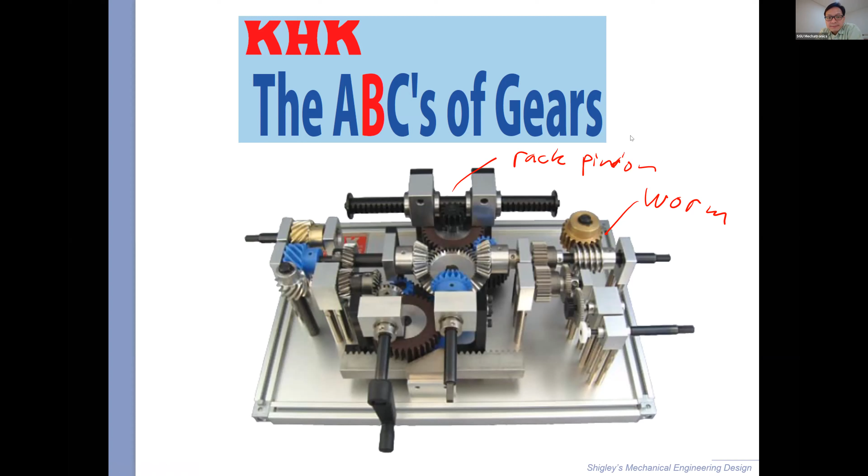Gears are one of the oldest mechanisms, because with belts, and probably true for chain, you need some complexity of rubber. You need to invent rubber, right? And then you have to know how to mold rubber with steel belts together, make it flexible but also strong. I guess they used leather in the old days as belts, but then rubber belts, more sophisticated belts, were invented later on.

Gears are pretty old. They say it's 350 BC, 2,300 years ago. These are one of the oldest concepts of gears here. You see the tooth is not exactly in a shape that is involute. That's the proper shape of a gear. It's called an involute. Okay, here is the modern gear with the proper shape.

The one that is most common when we talk about gears is really the spur gear. That's the term, okay? When you say regular gear, that means spur gear. Many times though, like in transmissions, we use helical gear. In car transmissions, I should say. Car transmissions, the forward motion mostly uses helical gear.

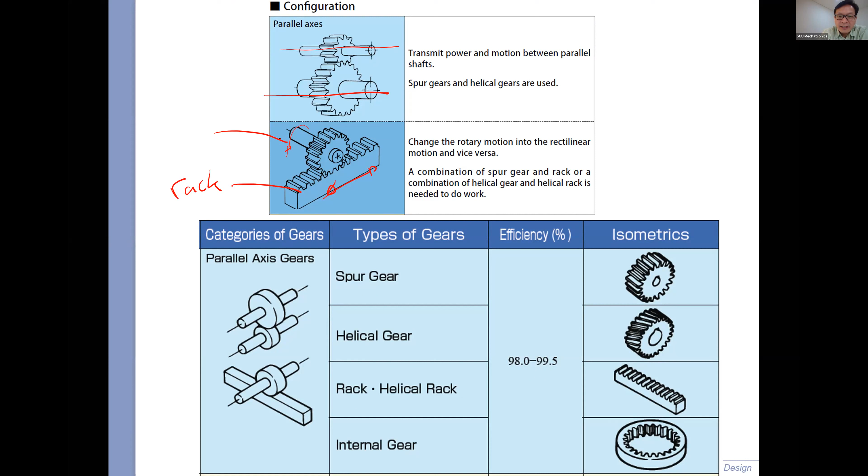Let's talk about them here. Yeah, I have this slide actually. Parallel axis, right? So spur gear, parallel axis. Here is a different configuration. Again, rotation and linear. This is called rack and pinion. The bottom one is called the rack. The gear here is called the pinion.

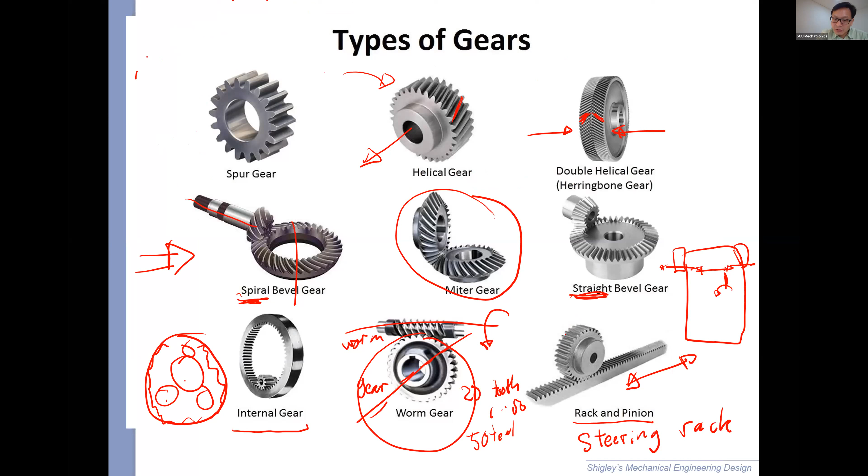You got intersecting axis gears here, the bevel. Miter is just a 1-to-1 ratio bevel gear. Okay, you got the straight bevel gear, got the spiral bevel gear.

Hold on, I need to get some tissue. I got my allergies today.

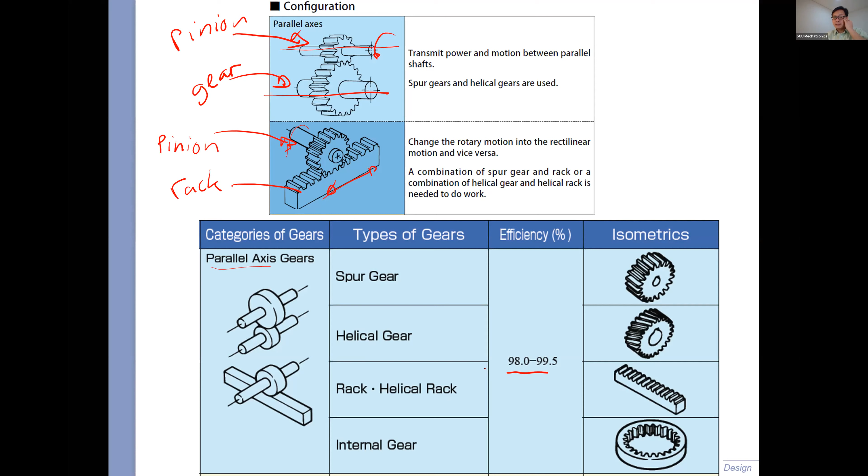Straight bevel gear. You see these efficiency numbers, by the way? These gears are very, very efficient. Power loss is really, really low. In fact, in your car engine transmission, a lot of the losses is due to churning the oil. Churning the oil has greater power loss than the gear inefficiency itself. Yeah, amazing, right? Probably your bearings have some power loss, but not the gears.

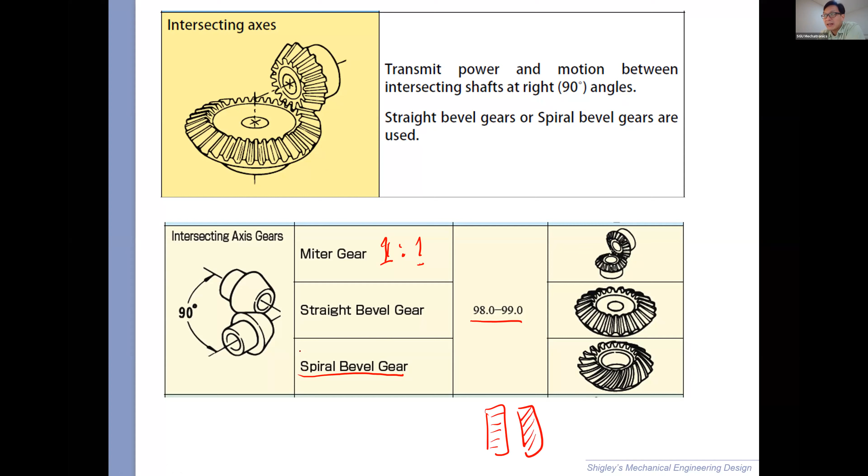But it's the same concept here. You got the smooth power transition. Your reverse gear is straight, by the way.

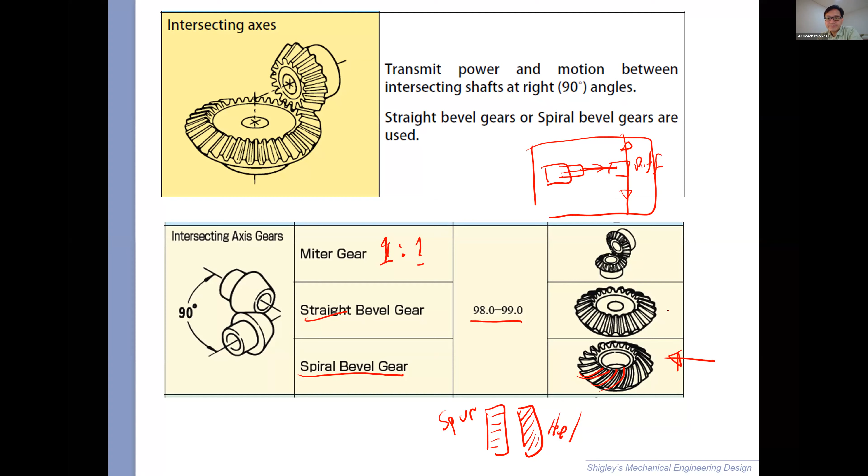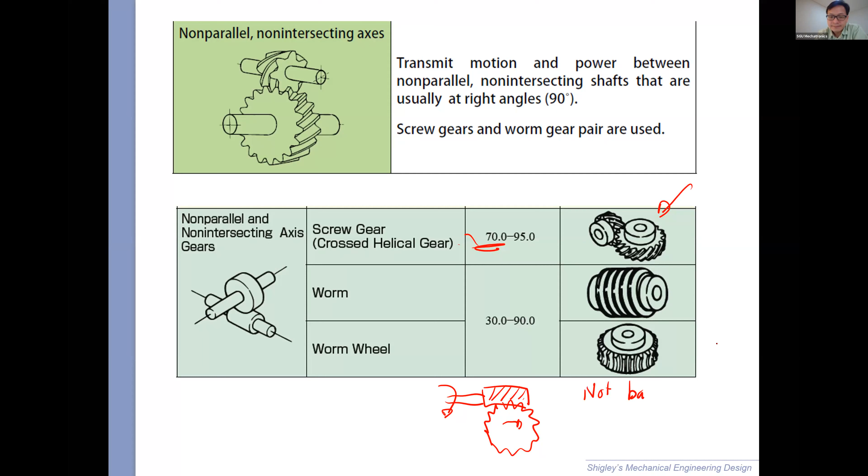So if you have a regular spur gear like this, if I drive it from the pinion to the gear, I can also drive it from the gear to the pinion, right? If I turn the input, this is the output; if I turn the output, the input also turns. So I can go both ways. In fact, if I have a gear ratio of 1 to 3, basically I can do 1 to 3 or I can do 3 to 1, depending which shaft I use as the input. Correct? Not so with worm.

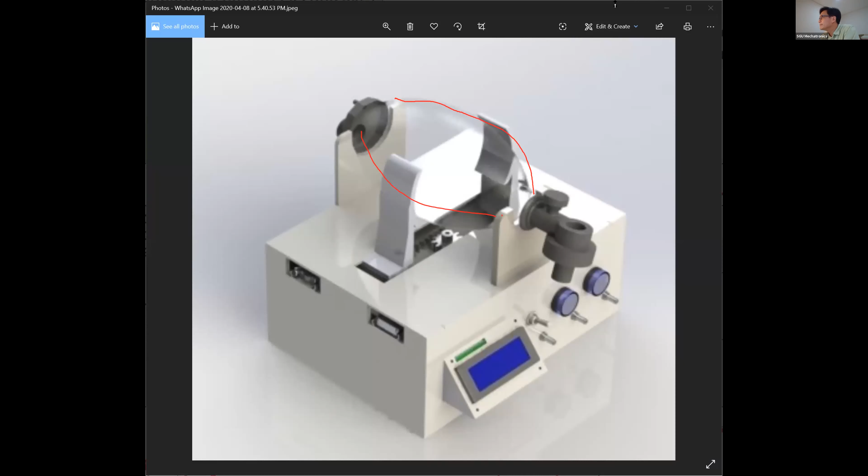Jadi ambu bag itu adalah bag yang dipakai di rumah sakit buat emergency. It will pump your lungs and put oxygen into your lungs, sementara sambil nunggu kamu di-attach ke ventilators yang bakal do the pumping on your lungs automatically for 24 hours.

Nah, tapi ventilators, they're running out of ventilators. Kalau kalian dengar, Presiden Trump di Amerika aja udah suruh pabrik mobil bikin ventilators karena we are running out and we cannot get up to capacity as soon as possible. We're racing against time. Salah satu solusinya, kayak di MIT, di banyak university ini lagi bikin ini.

Jadi apa alat yang kita bisa pakai untuk kompres ambu bag ini? Ambu is just the name of a company yang dulu bikin nih barang, makanya dibilang ambu bag. Ya, ini dipencet lalu bisa kasih ventilation.

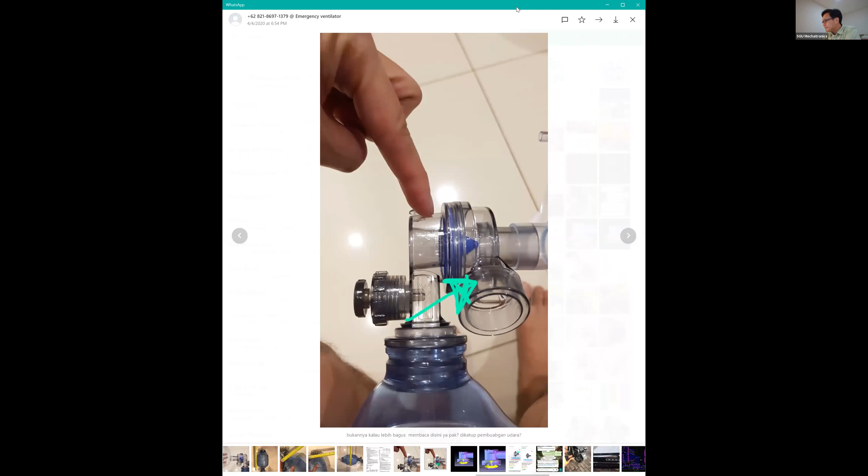Nah, ini ada one way valve-nya, keren banget. One way valve-nya ini dia push air into your lungs, tapi waktu kita exhale dia keluar lewat jalur yang berbeda. Nah, ada valve kayak gini nih, kalian kelihatan ya? Ini jadi duckbill valve.

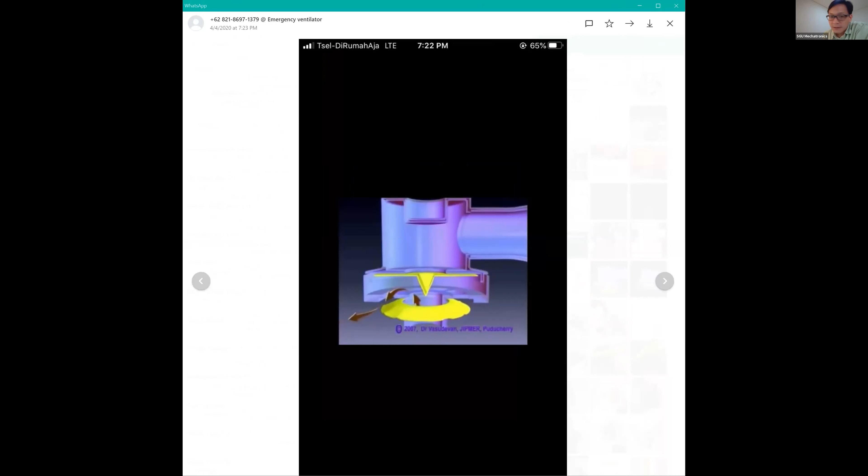Jadi angin dari sini masuk ke bawah, tapi kalau kamu exhale, ini keluar ke samping. Itu ada one way valve-nya.

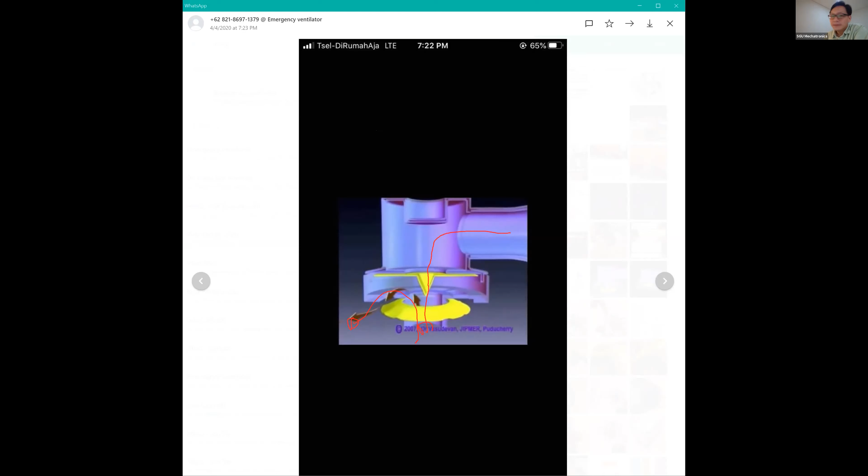But what I wanted to show you... mana ya? Nah, ini.

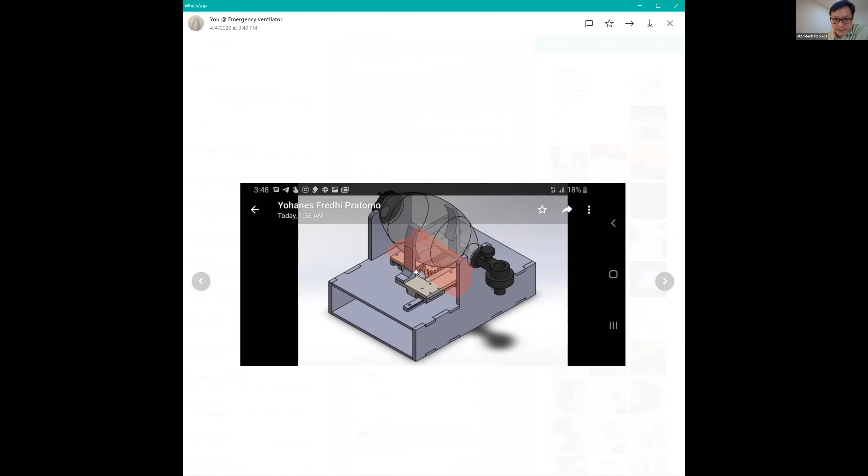So our first design, itu ada rack and pinion. Jadi tengahnya muter, bawahnya ini motors, terus dia ngompres. Kalau dia rotate one way, dia ngompres. Bisa bayangin nggak? Bisa, Pak. Ya, so it's a rack and pinion mechanism.

Nah, kita sempat pikir mau pakai worm drive, ngejepit, atau gimana gitu ya. Tapi masalahnya, salah satu requirement-nya kalau medical device adalah emergency, you have to always think about safety, right? Kalau kenapa-napa, ini mesin nggak jalan, ambu bag ini harus langsung bisa diangkat, lalu dipakai tangan lagi gitu mompanya. Kalau dia lagi posisi ngejepit, and then let's say the battery runs out, atau Arduino-nya fail, whatever, keluarinnya itu susah kan? Armnya kita mau buka nggak bisa.

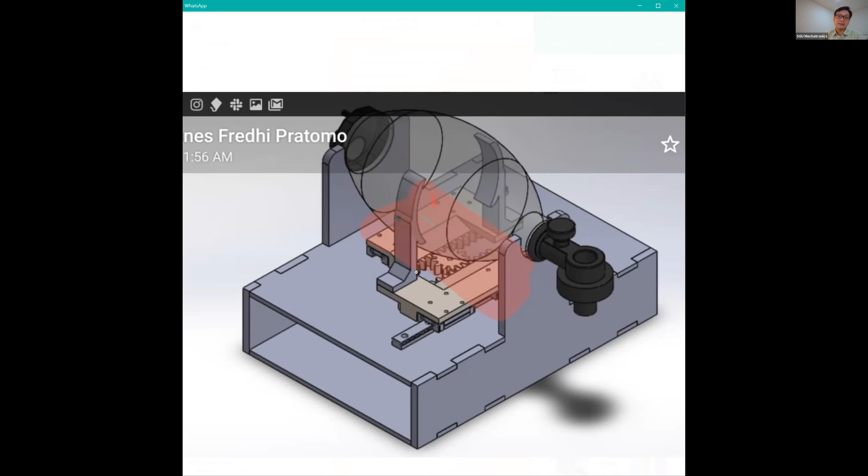Nah, itu karena tidak back drivable. Rack and pinion ini bisa. So one of the requirements, any mechanism that we use here has to be back drivable, gitu. That's what I wanted to say. Ngerti ya?

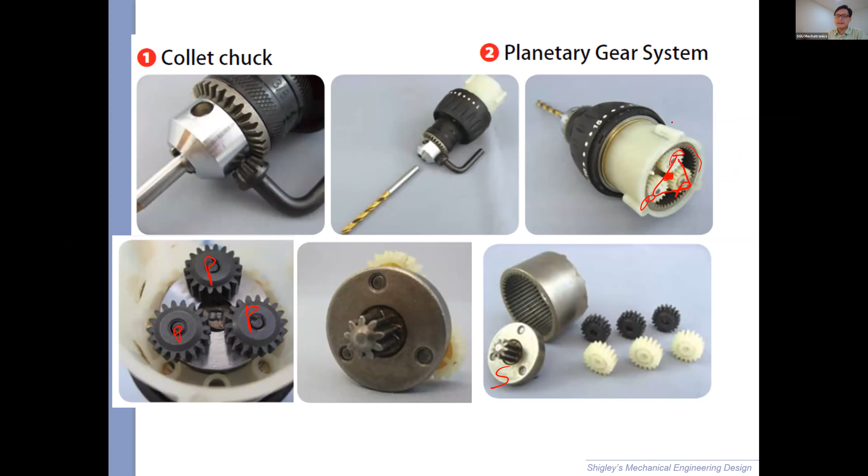Nanti saya kasih lihat mekanisme-mekanismenya pakai video ya.

Speed ratio, we talked about this a little bit last time kayaknya. Intinya the speed ratio for gears can be calculated using the number of teeth. Very simple. Jadi kalau number of teeth di sini 10, di sini 20, ya rasionya 2:1.

Yang mana yang antara yang kuning dan yang biru, mana yang speed-nya tinggi? Gear 1, Pak. Gear 1 high speed, gear 2 low speed ya.

What about the torque? 20 lebih gede torque-nya ya? Lebih gede torque karena dia low speed. Low speed, high torque, high speed, low torque. As simple as that. Jadi kalian harus selalu mikir, yang kecil, kalau dalam gear ya, yang kecil itu high speed.

Dalam arrangement kayak gini, yang kecil itu muternya pasti lebih cepat daripada yang besar. Dan selalu yang lebih kritis itu yang kecil, oke? Karena dia lebih lemah biasanya.

Nanti kita bakal get to the calculation. Dalam belt pulley system juga seperti itu, karena pulley yang kecil ini nempel beltnya lebih kecil, lebih sedikit, kemungkinan dia selip lebih besar kan? Kalau yang di sini kan kontak dari beltnya lebih panjang, jadi kemungkinan selipnya di belt di pulley yang besar lebih kecil.

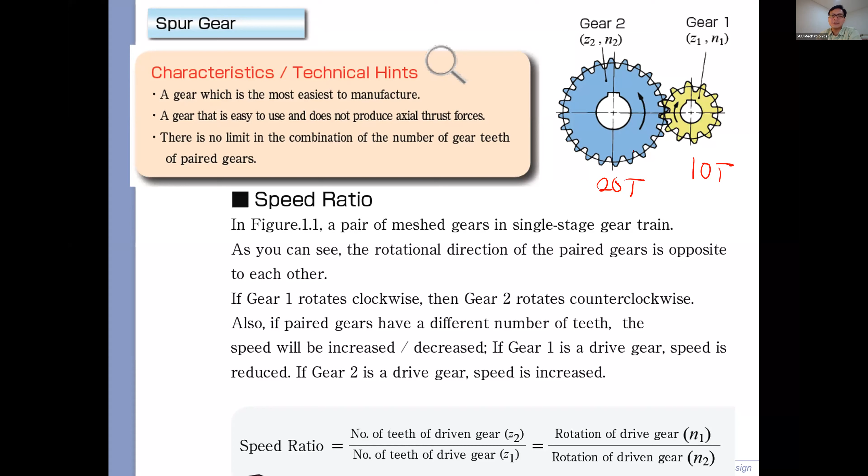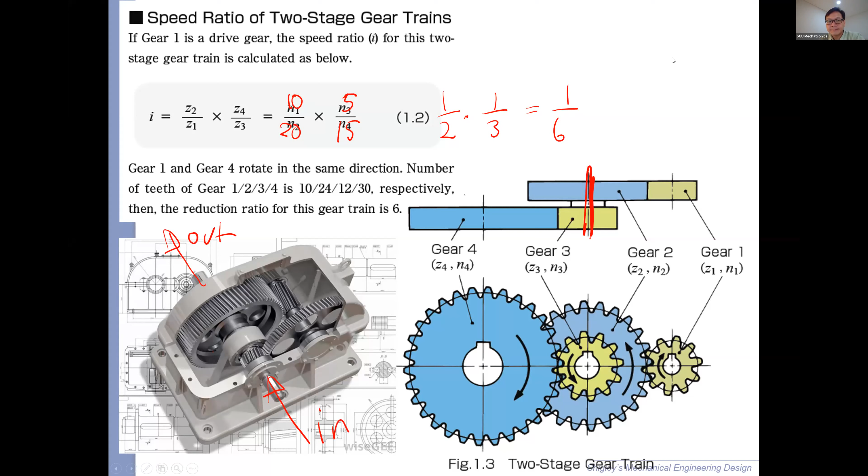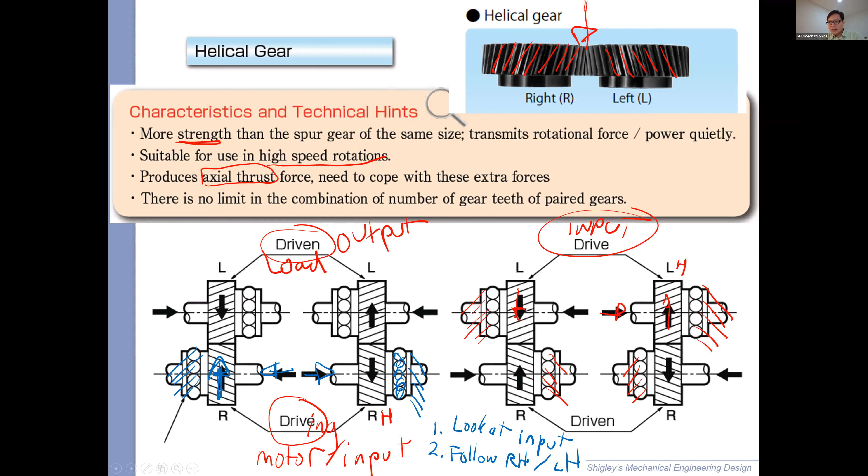All right. Internal gears. Now, the way we use internal gears is more in the context of planetary gear system. Let me play a video. Let's do a video on planetary gears. Oke, saya kirim via chat ya.

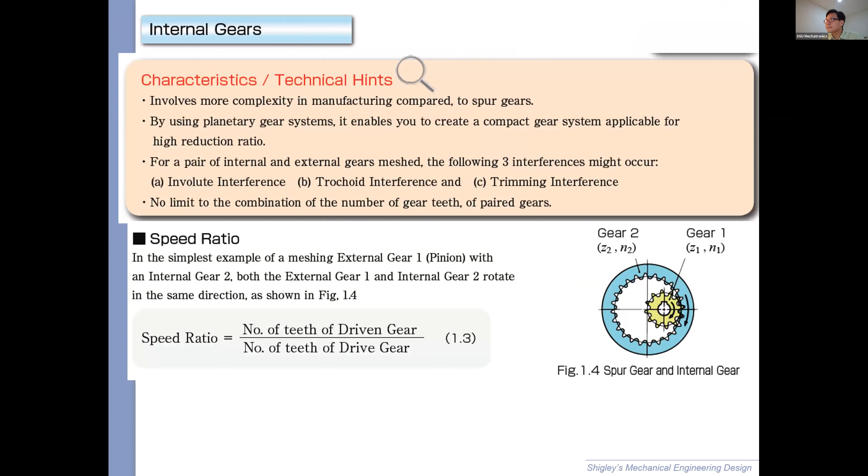Okay, internet's a bit slow. Go ahead and play the video. It is almost 5 minutes, so let's talk 5 minutes from now. Go ahead and click. Oh, ini kagak tuh. Oh ya, to everyone. Okay, hold on. Okay, does everyone got the link? Di chat ya. Okay. Go ahead and play the video, 5 minutes. Udah ya? Saya coba jelasin beberapa hal di sini. Okay, everybody's done? Can you respond? Udah, Pak. Ya Pak, udah. Okay.

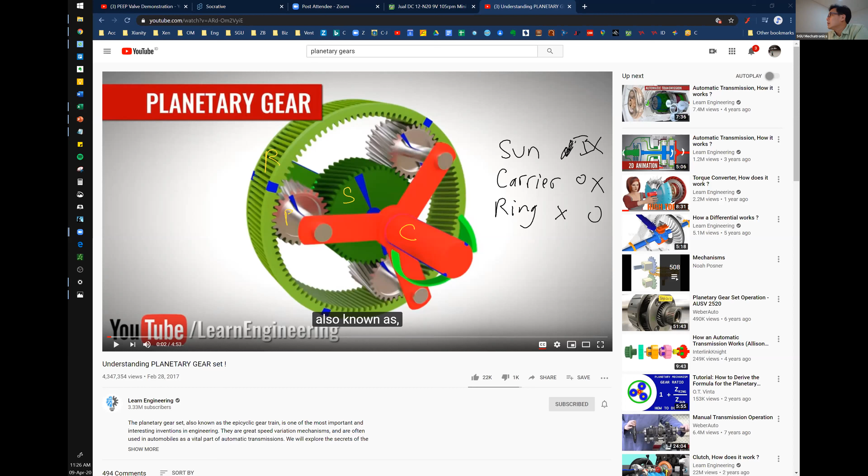Or you can fix the sun. No, you fix the planet, and then everything rotates together. Okay, that's the third mode. I have another video on that, so it's not this one.

Let's see. No, I showed that one. No, that's pretty much what I want to show. Okay, those are the three modes. I remember I have one more video on that ratios.

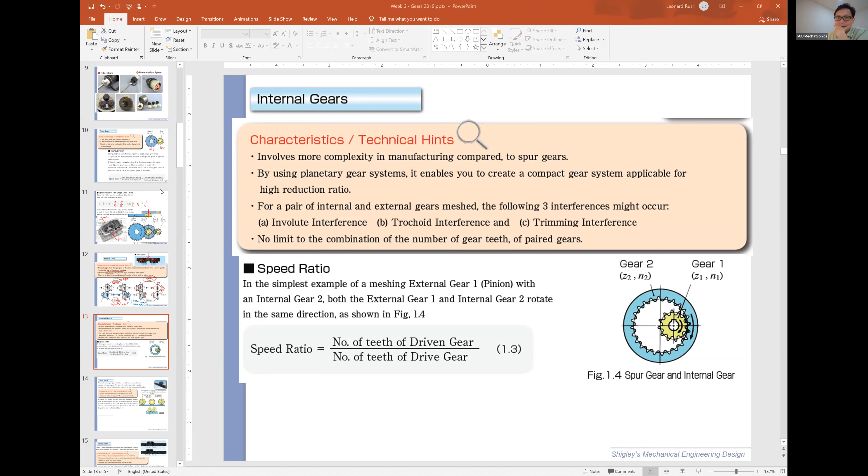Advantage of helical gear. Ini screen share saya udah balik ke PowerPoint kan ya? Udah, Pak. Okay. So it has more strength, and the reason it has more strength is because you have multiple teeth in contact at the same time. Ya. Jadi kalau spur gear kontaknya kan begini. Karena dia miring, dia ada multiple teeth yang bisa in contact at the same time. Jadi it has greater capacity. You can do high-speed rotation also because it's less noisy, less vibration. Those are the two main advantages of helical gear.

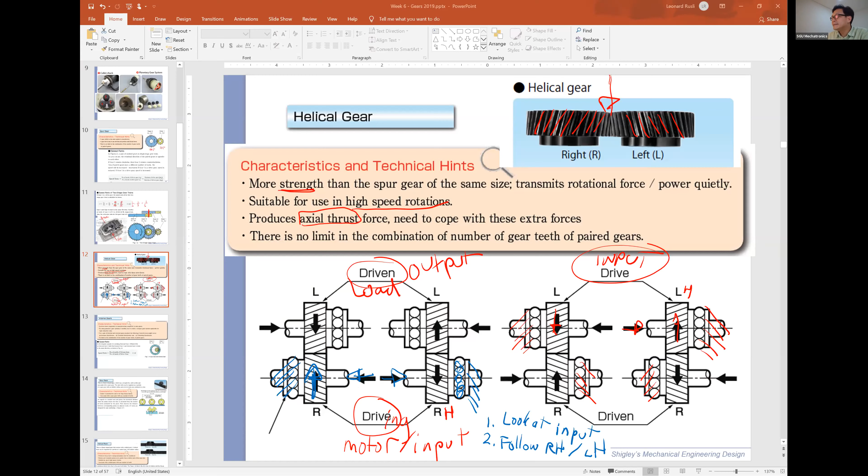Yeah, so your helical rack. Dia nggak exactly helical, but it's straight, slanted, right? You see the teeth are at an angle. You got left hand, right hand. This also creates a thrust, okay? Look at the bottom here. There is the drive, meaning the input. In this case, the input is almost always the pinion, ya.

The pinion, kalau dia left hand pinion, ya kan? Use your left hand. Okay? So, karena dia begini, thrustnya ke atas. Di sini juga sama, right hand. Thrustnya ke atas, thrustnya ke bawah. In the picture. So, same rules. Just use your right hand or left hand, depending on what the input is, not the output.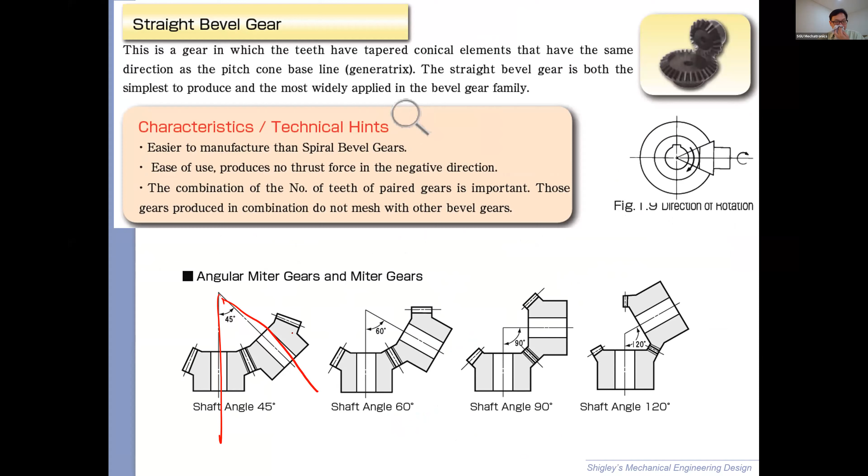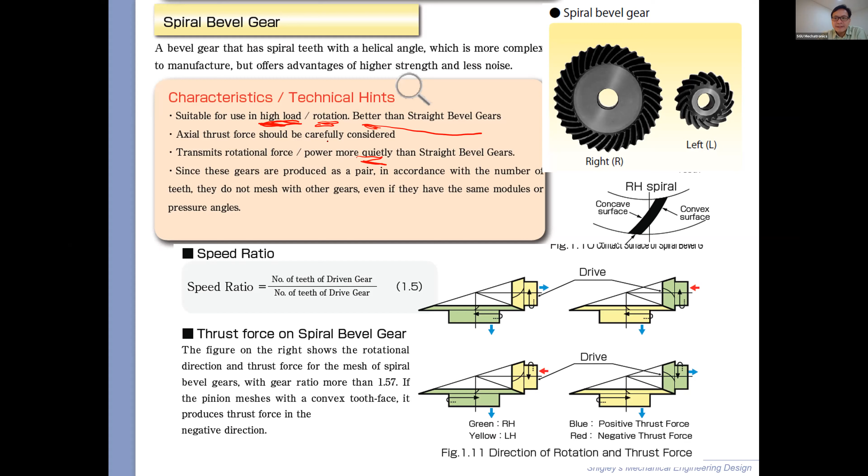They can be at a different angle, by the way. I rarely see them though. Not that common, but they can be at a 45-degree angle. Okay, same as the contrast between helical and straight gears. The spiral bevel gear compared to the straight bevel gear, they can do high load, they can do high RPM. In general, they're better than straight bevel gears. It's quiet, just like helical. All right. Manufacturing probably a bit more expensive, but they got the advantages.

Okay, so you see you have the reactions here, right? So the thrust bearing, okay, so you got right hand helical. It wants to move this way. Rotation is this way, okay, this way. So the thrust is this way. Oops. You got the bearings here. So just use your right hand or left hand on the input there. And in the case of worm gear, the input is always the worm.

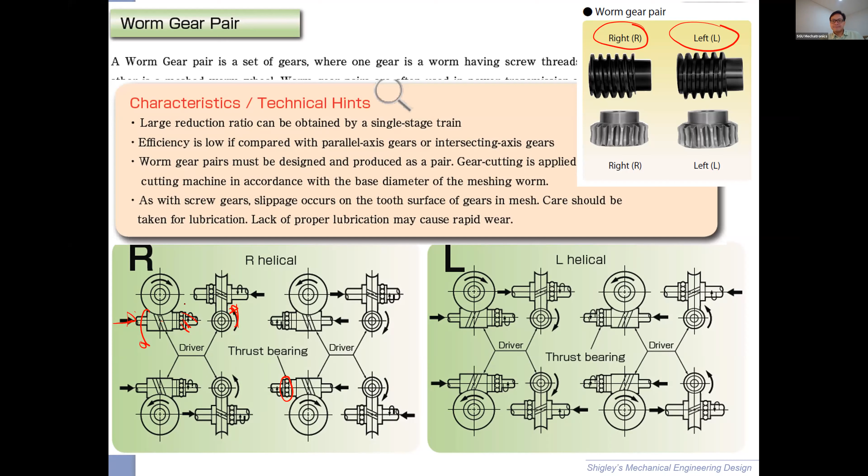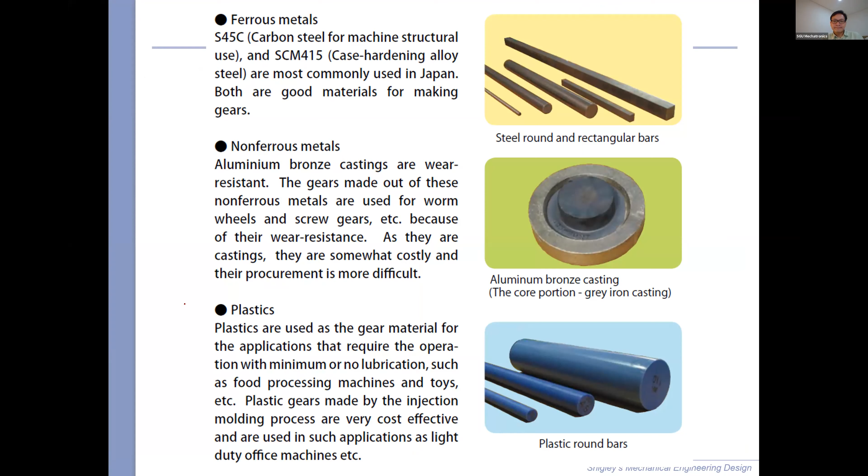Gears can be made out of several different materials: ferrous metals, non-ferrous like bronze, aluminum bronze, plastics, very common. When you have low load, really nice, right? Doesn't take as much lubrication because they're usually pretty low friction. A gear tooth, you can break the gear tooth here because what do you call this thing? Remember, whenever you have a sharp point like this, what do you call them? Stress concentration. Stress concentration, correct. Okay. When you have contact like this, it's also stress concentration, but when you have bending, again, here's the stress concentration. Usually you put in a bit of radius.

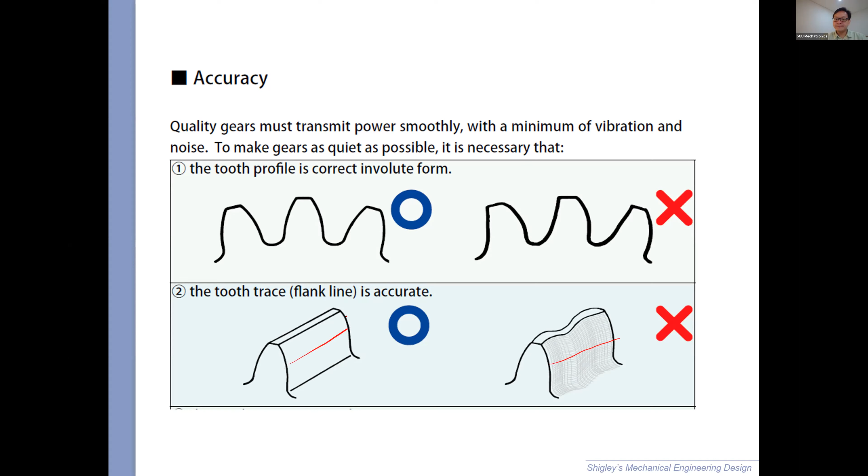Tooth accuracy is important in manufacturing. The tooth trace line here also needs to be straight. Tooth contact in the middle instead of at the edge. This has to do with your alignments between the shaft and the center distance. Okay. Run out. You remember run out, right?

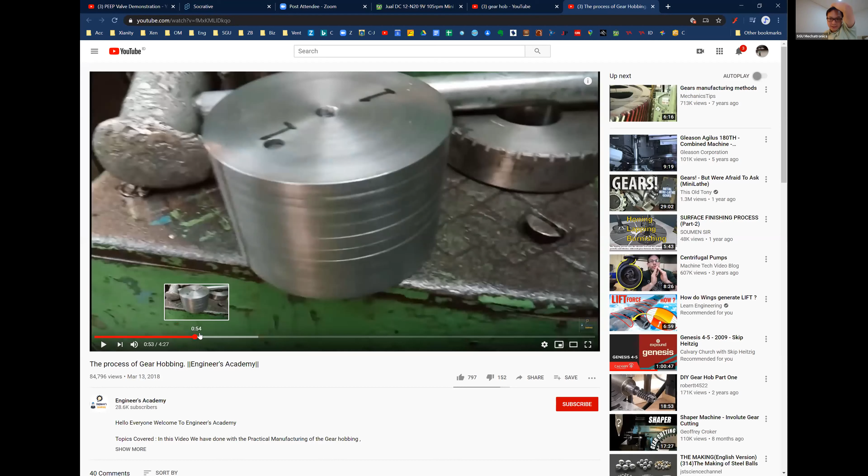So the way you manufacture gears, first you start with this big piece, right? Let me skip some of these. There. You got this cutter trying to cut the gears. So it's cutting the gear tooth. In straight gears, it's easy, but in helical gears, you gotta move the shaft while you're cutting.

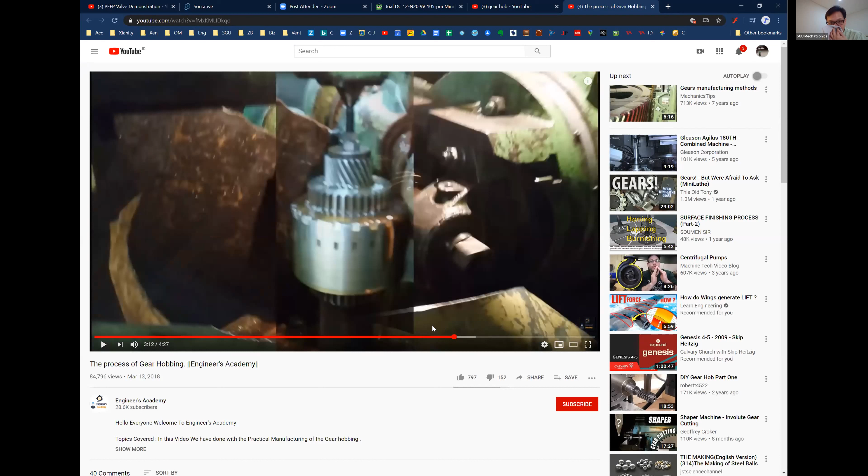Yeah, a lot of lubrication. You see the gear tooth is starting to form. And then eventually it gets to this. So these are the gear cutters. It's called a gear hob. And you got your gear like that. So this is called the gear hob.

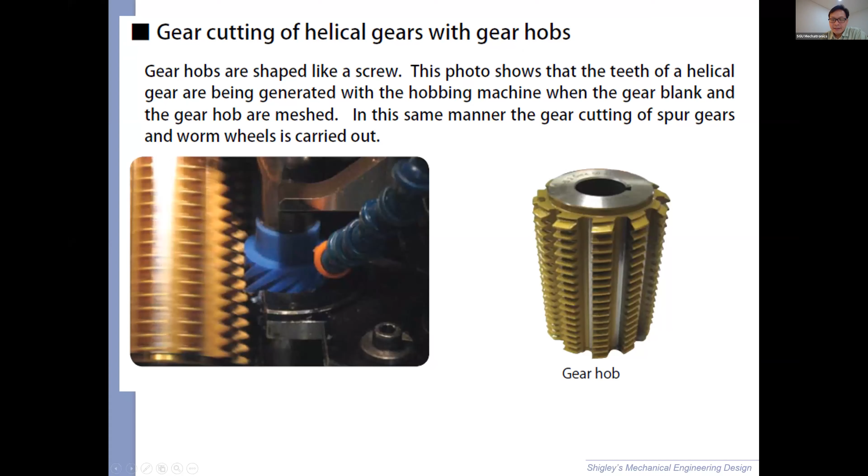Plastic gears, you do injection molding, obviously. You got sintered metal too. Here's your powder metals packed together, and then you put it in an oven. So they sinter, meaning they melt and they bond, and it becomes a solid piece. It's a bit porous, but the good thing about this, you can mix in your lubrication too, right?

So let's say you're making a bronze and you want to mix in some carbon or other lubricants, you can manufacture it together. So as the gear wears out, you got the lubrication in for dry applications.

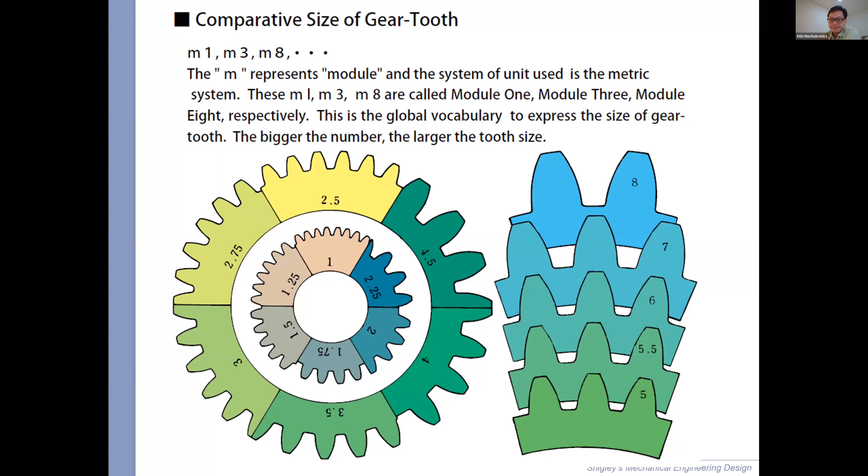But for tiny pieces, high volume production, powder metallurgy is often the manufacturing method. Size of gears: the tooth itself has sizes and they're called module, right? M1, M2. The greater the module number, the greater the size of the tooth and the greater the capacity. The shape of the gear tooth is actually a special shape. It's called the involute, okay?

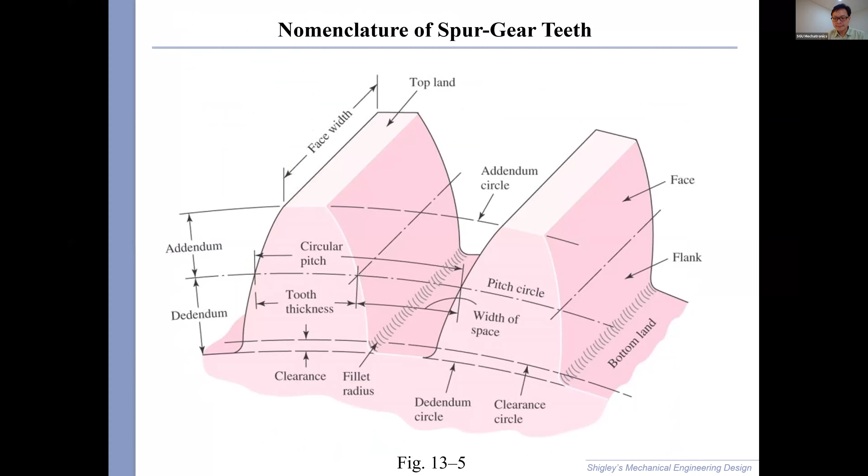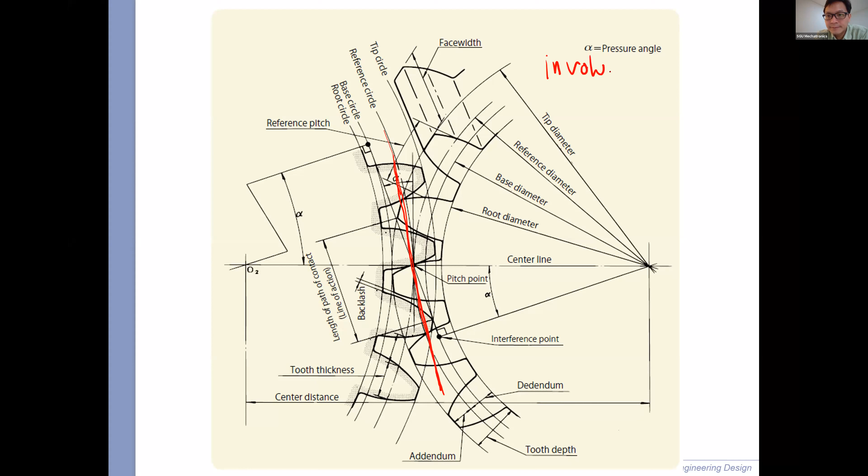They make contact along the line. This is called the pressure line. Oops. Okay, it's a bit tough. There. That's your pressure line. So your gear will always make contact along this pressure line. If your gear tooth shape is not exactly an involute, they will not have this straight pressure line, which becomes a problem because then your torque transfer is not constant.

Here's a bit clearer. Okay. Here's the involute profile. The way you do this is, think of a wheel, and then you wrap this with a thread (benang). Ya.

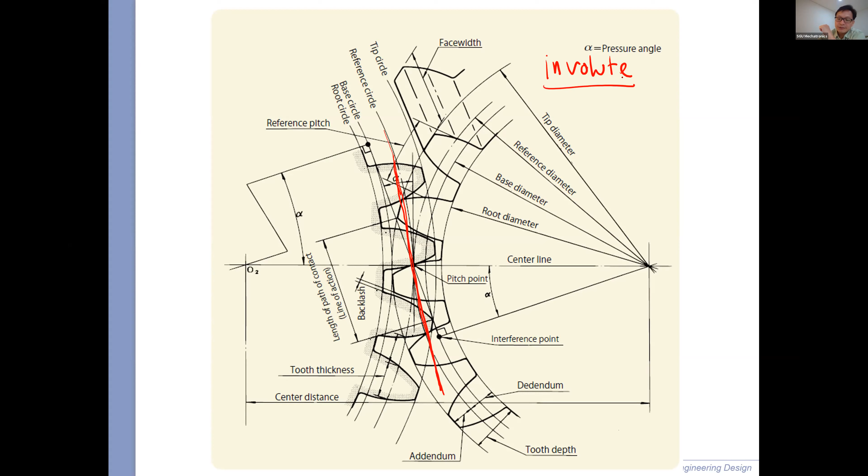And that creates that smooth power transfer. So it's a special mathematical shape. Okay, this is the pressure angle here. There. Okay, the gear contact is always made along this line.

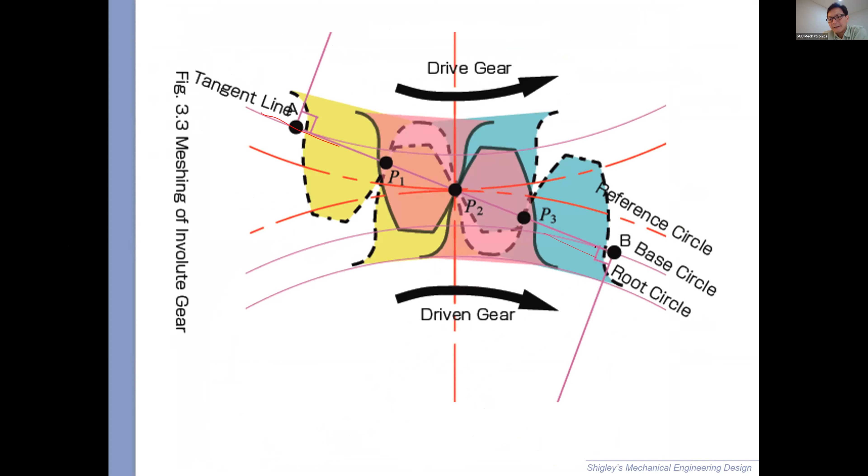The shape of the involute also varies by the number of teeth on a gear. Once you have a larger number of teeth, the shape of the involute approaches a triangle. And if your number of teeth is less, then the shape is more like this, and they usually make an undercut so that they don't collide.

These are just some tooth geometry. I'm gonna skip some of these. Here is your rack and pinion. In a rack and pinion, the pinion has an involute profile, but the rack has straight teeth like this.

Remember, a rack is pretty much a spur gear with a diameter of infinity, right? If you think of a gear, you make it bigger and bigger and bigger. Eventually, it's as big as this Earth, right? If you look at the Earth, it looks flat, but it's not flat. I'm sorry for those of you who believe in flat Earth theory. Okay, it's not flat, but it's a very large diameter, right? If it's so large, then it looks flat. And that's exactly what this rack is. The rack is pretty much a spur gear with a pitch diameter of infinity.

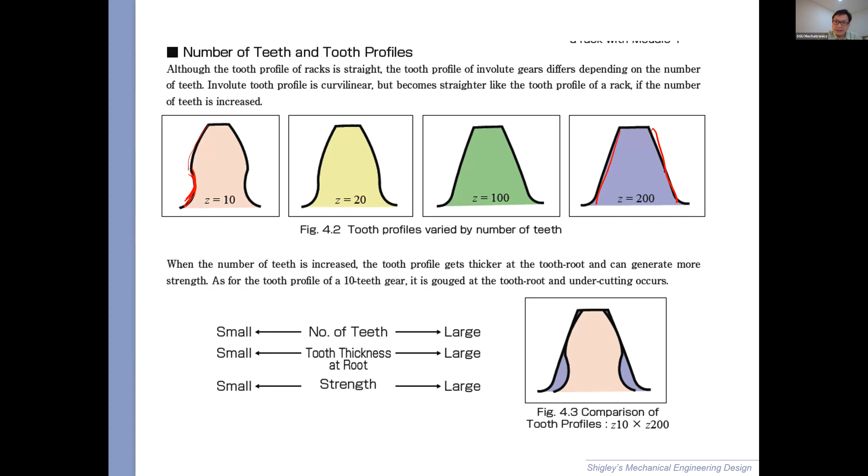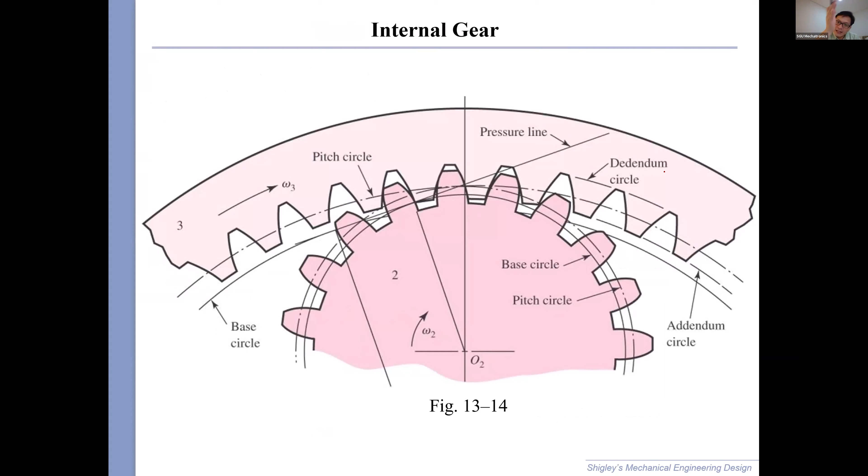And so remember, as the number of teeth grows, the involute profile approaches a triangle profile. And so here you go. The rack then has almost like a triangle profile. Here is your internal teeth. They're shaped kind of an inverse of the involute. Yeah, let's skip some of these.

Interference. Okay. Here you have to take into consideration, when your number of gear teeth is too small, you can have what is called teeth interference. A teeth interference is when you make unintended contact like this. These are unintended contact, and they make contact in contradiction to one another. We should make contact in the pressure line, right? And then there is an additional contact where it's not supposed to be. So that is called the interference, gear interference.

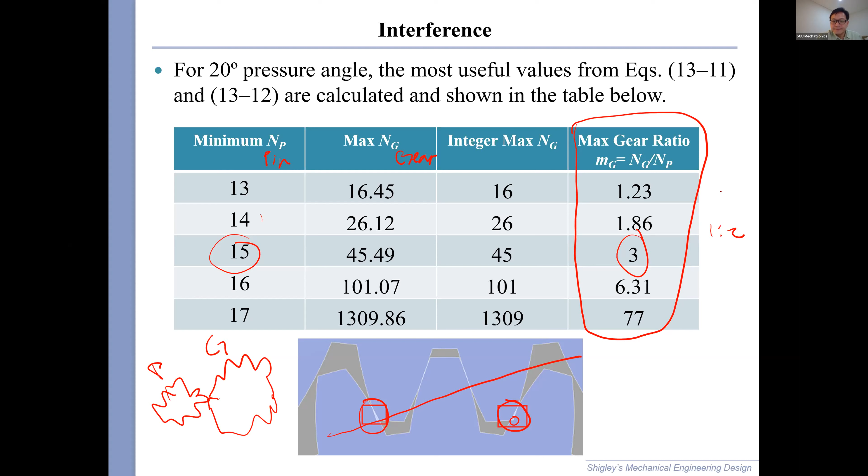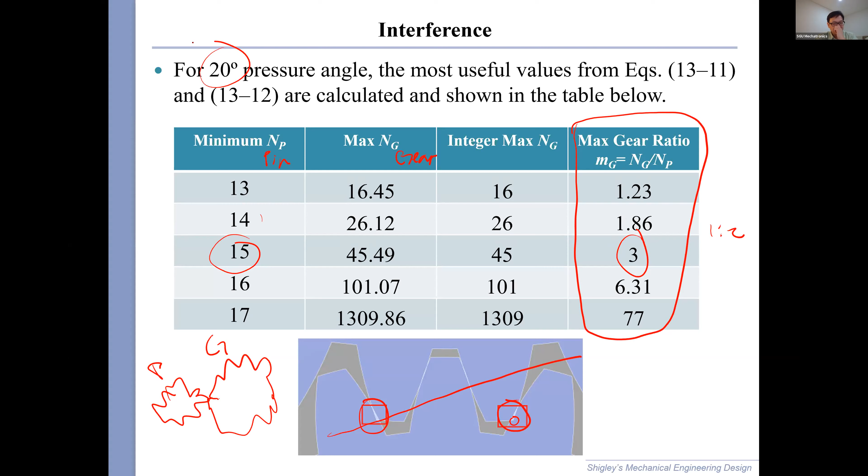Okay. So, or the opposite, right? You can think of it like if your gear ratio is 1:2, then you wanna at least be 15. Okay. So we'll do more of these in the calculation later on. If your pressure angle is 25 degrees, it's a different table. This is for 20-degree pressure angle. This will be used in the calculation later on. Okay, this is also calculation. So let's save that for the next session.

Lastly, I want to show you a differential video. Kind of nice for you who love cars. Gears differential. Where is my differential? Huh, it's gone. Okay. Differential. I'm gonna send you the link via chat. It's 5 minutes. Go ahead and play the video. We'll talk again in 5 minutes or so.

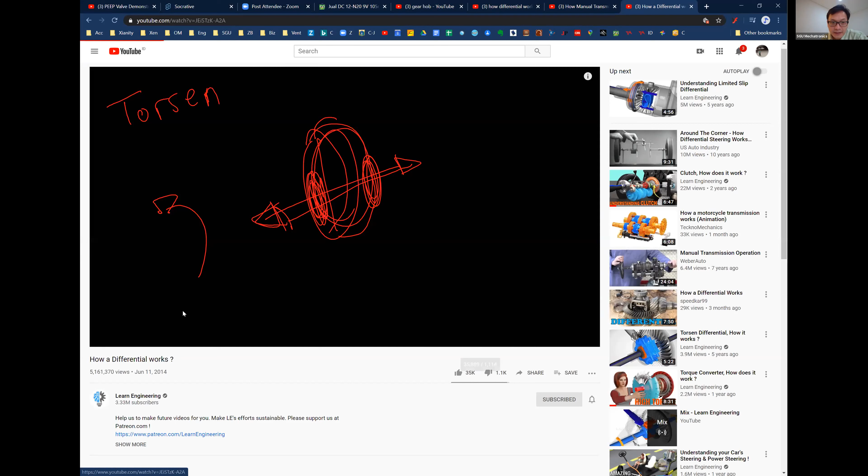Torsen is a trademark of the JTEKT Corporation. The Torsen differential has many patented components and so the engine power received by...

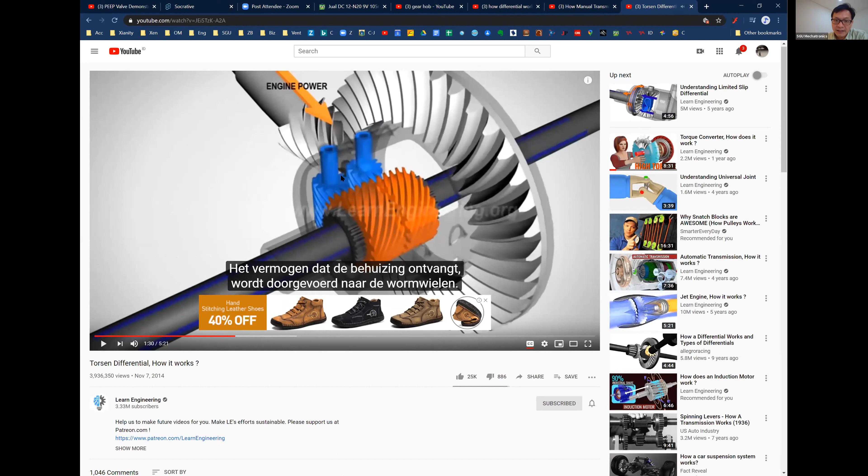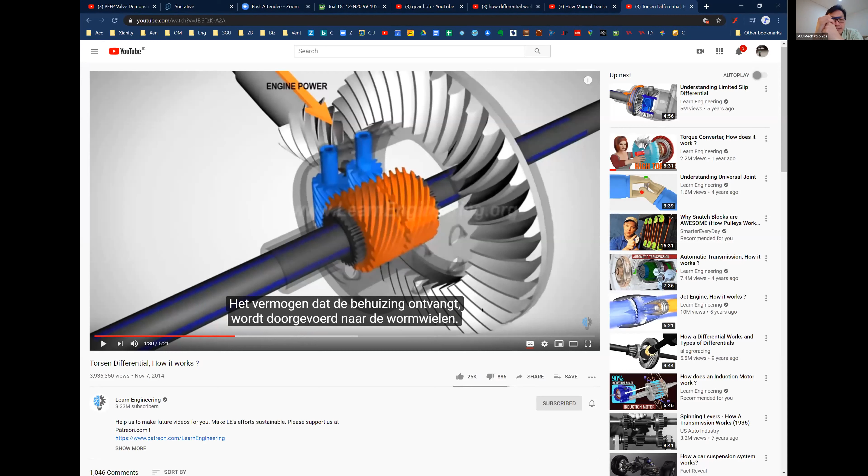Jadi makanya Torsen, Torsen stands for torque sensing. A very beautiful technology. Okay, so berdasarkan torque, kontras antara torque kiri dan kanan, dia akan transfer that. Jadi very beautiful. It works flawlessly. All mechanical, no electrical.

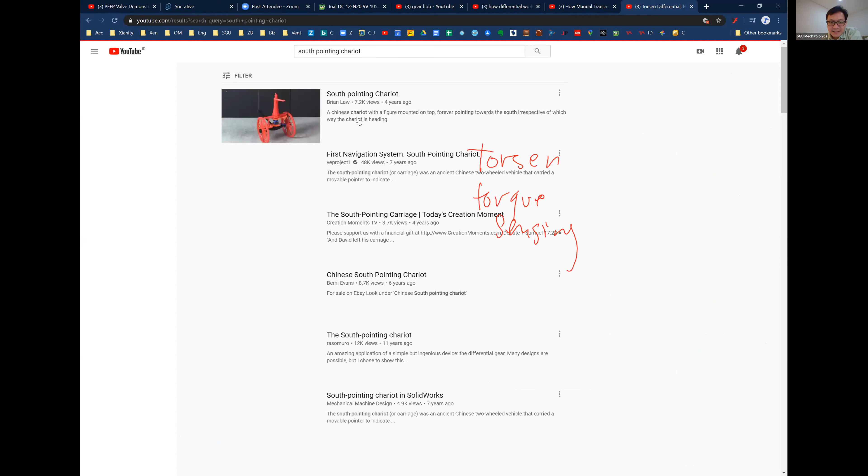Yeah, so differential is invented a long time ago by the Chinese, I think. Ever heard of the south pointing chariot? South pointing chariot will always point to the same direction no matter where your chariot turns.

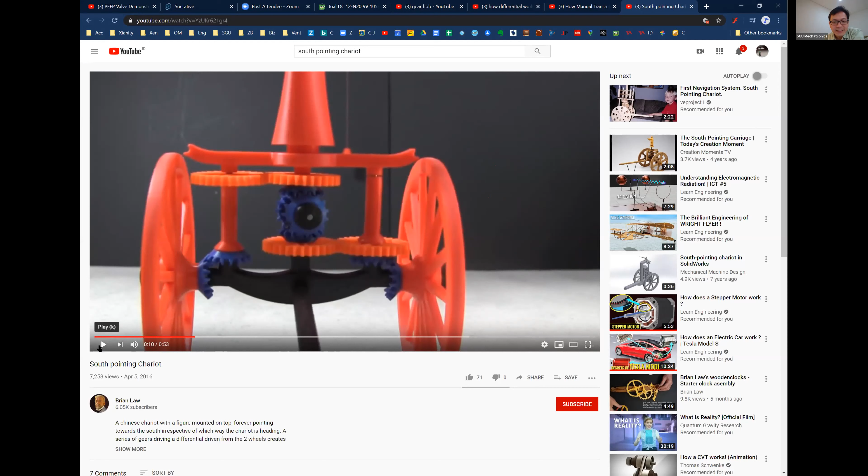Okay, see that? Okay, you got a differential mechanism actually on the bottom that actually compensates for that. So the guy on the top will always point to the same absolute position no matter where the chariot turns. Makes a good compass, right? So you're not losing direction. Cool stuff.